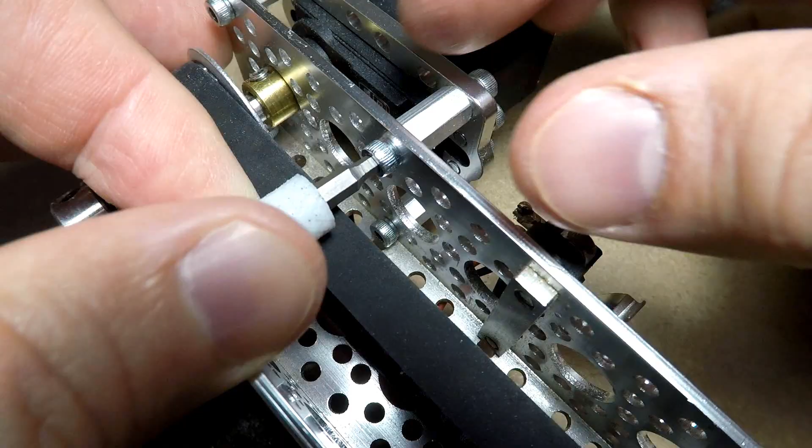Jeremy S. Cook here, and I've got a set of bits made by Wiha that are pretty good. Got a driver and an extension, so if you need to reach into some place you can't normally access, it's pretty easy. This makes it nice and long, and you can put it in, whatever, drive down the bits you need to. But what if you need something a little bit shorter, something to get into places that normally you couldn't? I didn't have a real good solution for that, so I actually 3D printed something.

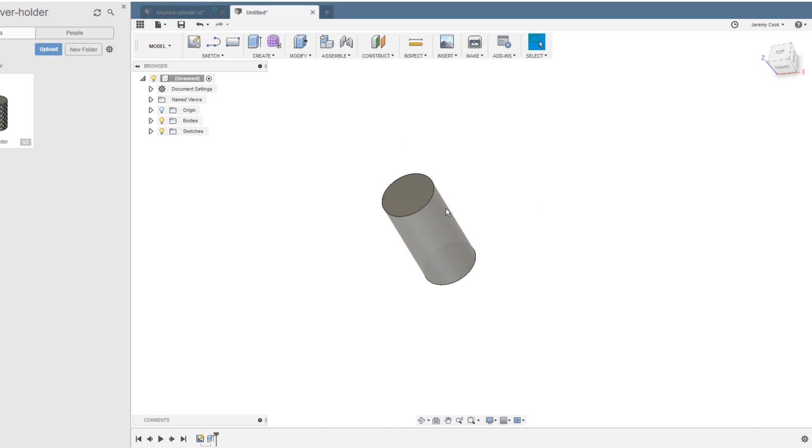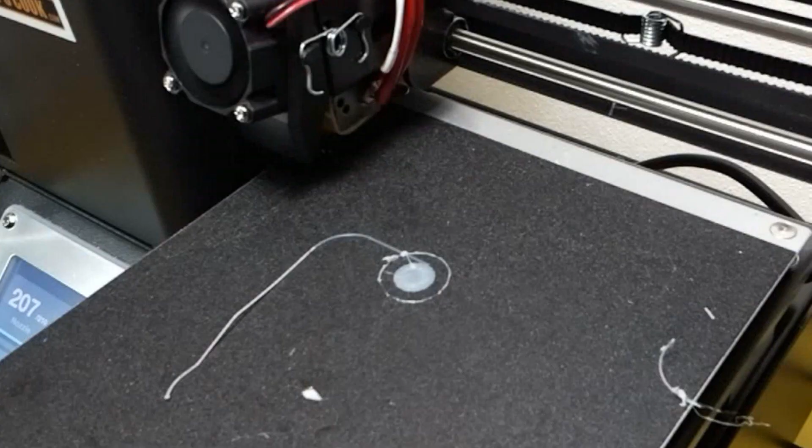The biggest thing was making the internal hex on this, measuring it out. It's about 0.156 inches, and I modeled that out on Fusion 360. This is just a regular circle, extruded that, and then put the hex pattern in the middle. This is pretty easy to do. It's got an actual function for that, so you don't have to calculate all the angles and draw it out by hand. It's just really easy. You do that, extrude it. Now, there's the results there.

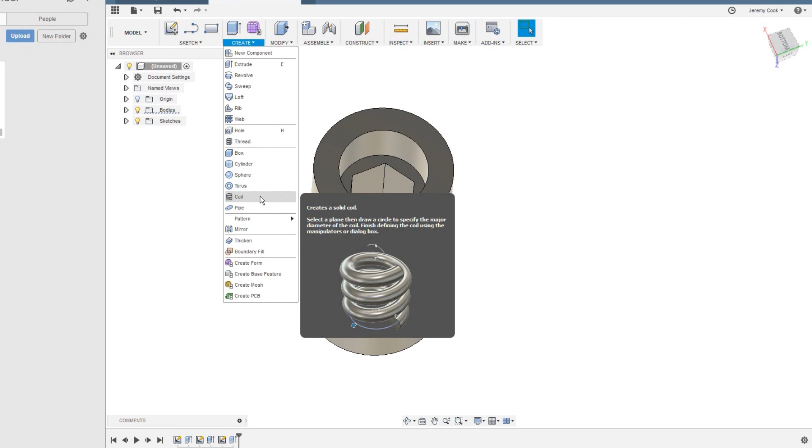The problem was I didn't put nearly enough clearance for this. Apparently, once the PLA is extruded, it kind of expands a little bit, so it's not quite the same as machining it, I suppose. So on the second version, I decided I'd just go all the way on this, actually put a magnetic holder on this, and I went through several revisions of this. I also put on a knurling surface on the outside.

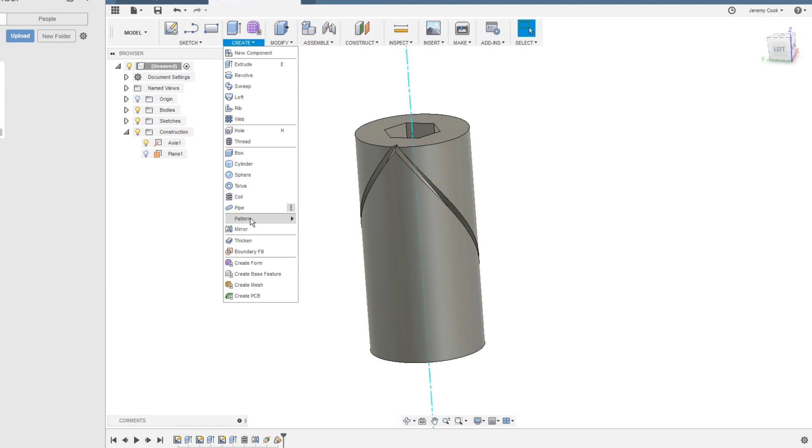Now, this started out with something called a coil on the outside. Other drafting systems might call it a helical sweep, but you do that halfway around on the full length of your cylinder. And then from there, once that's done, you can mirror it on the surface. From there, you just do a circular pattern, and that's all there is to knurling something. It was actually quite easy once I figured it out. From there, you can play with how many knurling surfaces and stuff are on there, and just get something that really looks good to you, because that's kind of what it's about, how it looks and feels.

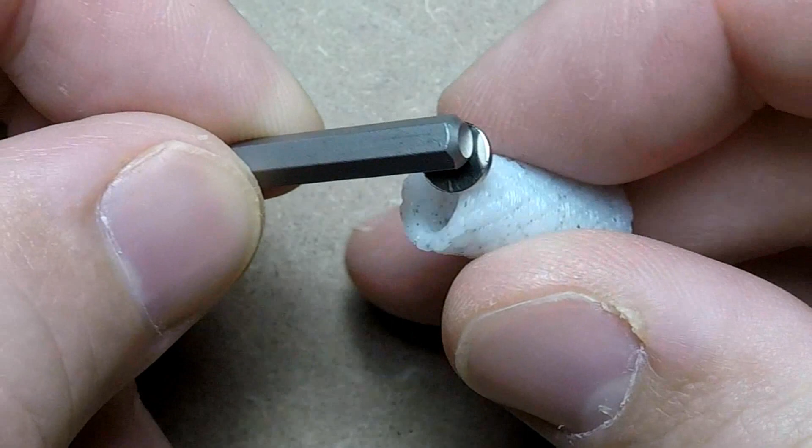From there, I put a fillet on the inside of the hex, and eventually I put one on the outside too, but you'll see that in a minute. So this is the third version of this, believe it or not, and that went in pretty nicely, and the magnet went in too. Looks pretty good, but the thing is that magnet, it just flips right out. Ideally, I wanted that to be a press fit, so I went back to Fusion, redesigned a few things, and then printed a new version out.

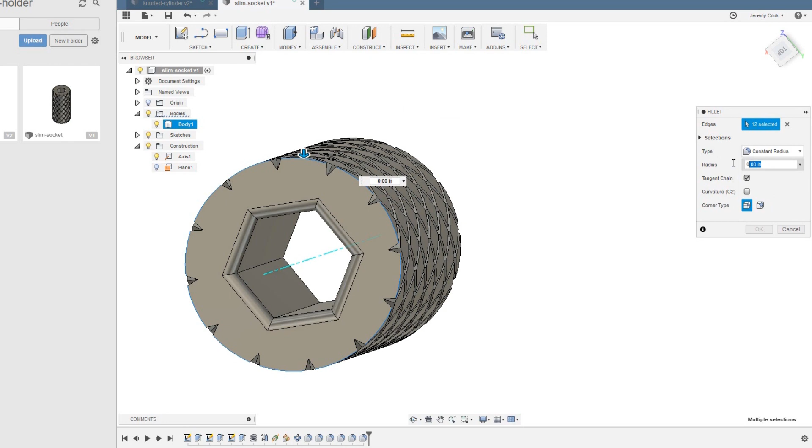Now this new version actually did work as a press fit somewhat, but it wasn't very good, so I had to hot glue it down on the outside. This would have worked, but as you can see, there's another 2 minutes left in the video, so I did make a new version eventually. What I did here was, first of all, I put a fillet on the outside of the outside, because I thought that would look pretty good.

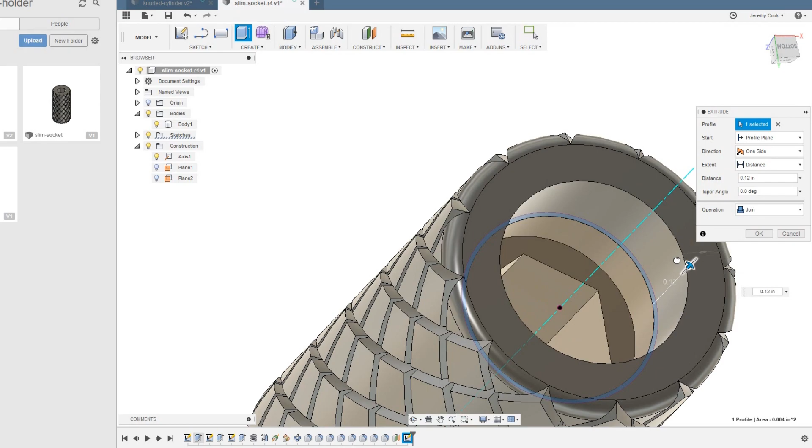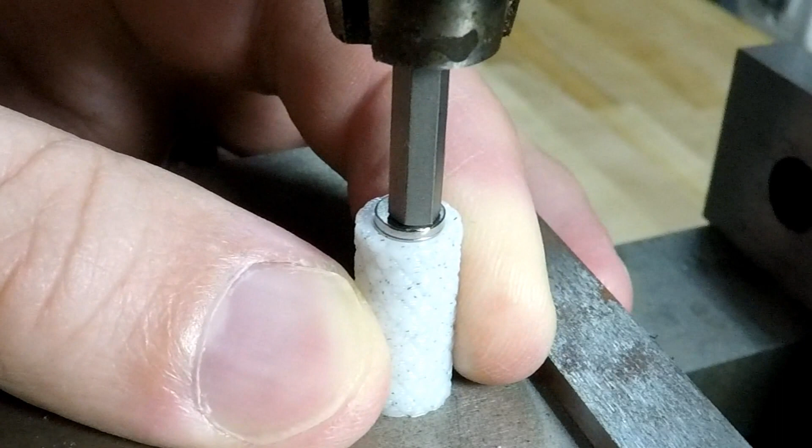And then the big thing about this revision is I actually put a channel down the inside. Left the rest of it the same diameter, but this channel would allow me to press fit 2 magnets in the middle and then have it lock in pretty well. And with this design done, I printed it out, and then after that I press fit the magnets in the middle. Used my milling machine for that. The spindle locked it down. This is a really good use for this, besides actually cutting things. Obviously you could use a hammer or whatever else.

After that it was nicely magnetized and slid the hex bit right in. Or it could have used a Phillips or flathead bit too. And there's a little demonstration of it taking the hex bolt out of this. That's actually some Actobotics, a slider that I use in some of my videos. And goes back in. Now if you put a lot of torque on it, it does seem to kind of deform the inside a little bit. So I think this would wear out eventually, but for intermittent use, it's pretty good. You can see it there in a more restricted space. It does work, although it is a little bit tight for it.

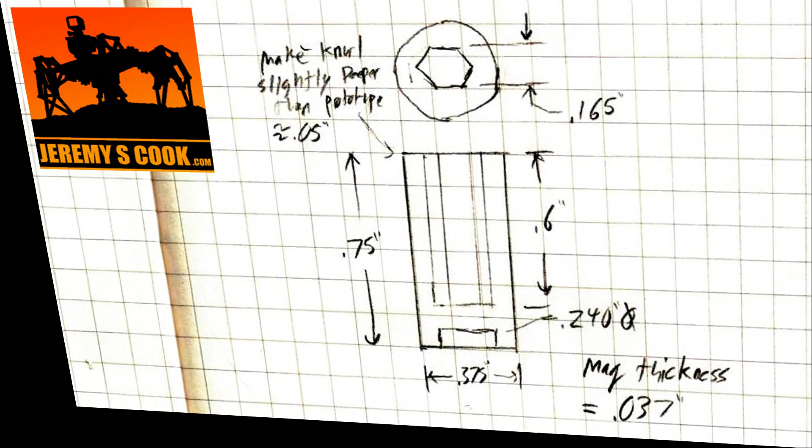Oh, and one more thing. If it's too tight, it is hard to get it in there correctly.